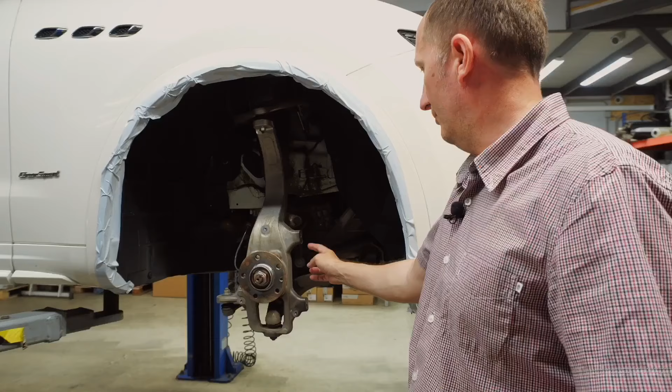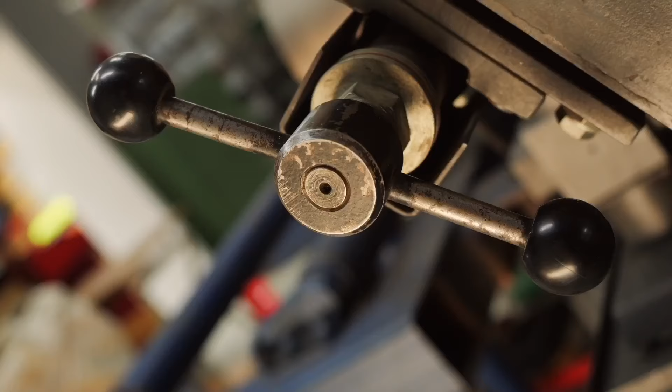The required part is covered with protective tape. The rear axle consists of a floating caliper with a servomotor initially. The front axle is a 6-piston caliper by Brembo, composite brake disc and an aluminium hub part on pins. The whole design is quite well done, but the size is smaller than required for this power and mass. Here we will have a bracket installed, as we are about to show you.

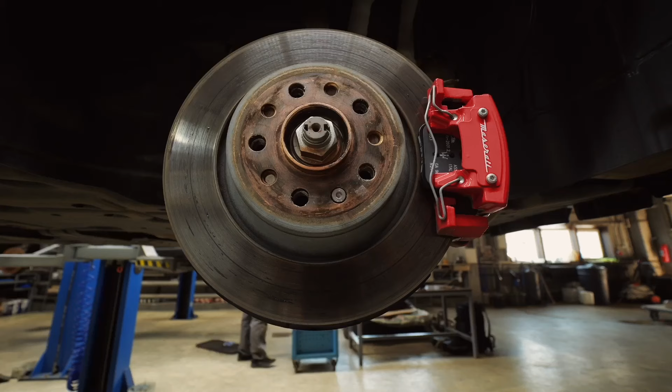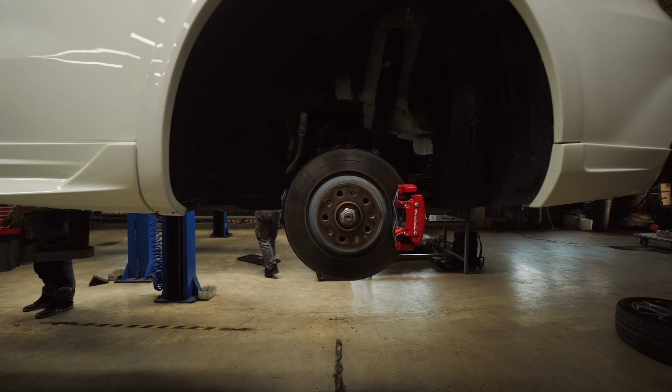Now I will tell you how the design of the braking system is being developed. The car arrives, we dismantle the braking disc, the default braking system, and eventually we see a marvelous aluminium knuckle by Maserati with radial binding of the braking caliper. The caliper is a default 6-piston one, but for quite a small braking rotor.

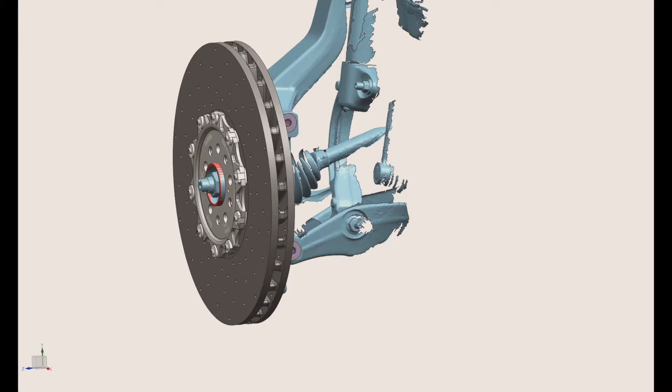For the technical task we have to use a carbon ceramic rotor sized 440 by 40. We place it for a correct angle by the Z-axis. Then a hub part is designed and this assembly is practically done. Then we have to line up a brake caliper. Here we will have a 6-piston caliper by Brembo

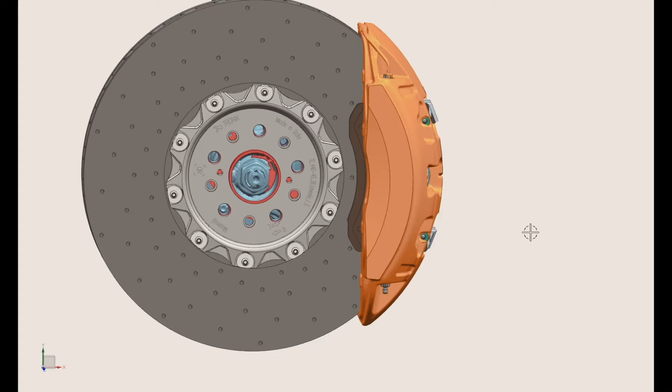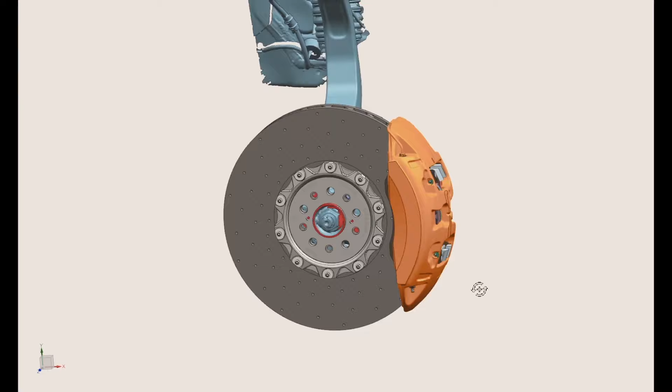with a zirconium dioxide insert. Initially, the caliper is installed with the binding behind the axle of the car. As we plan to install it before the axle, we will have to change the polarity. That is why we unscrew these fittings here and place them on top, whereas the tube is placed below. For now it is not seen here, as we still have to recess in this spot.

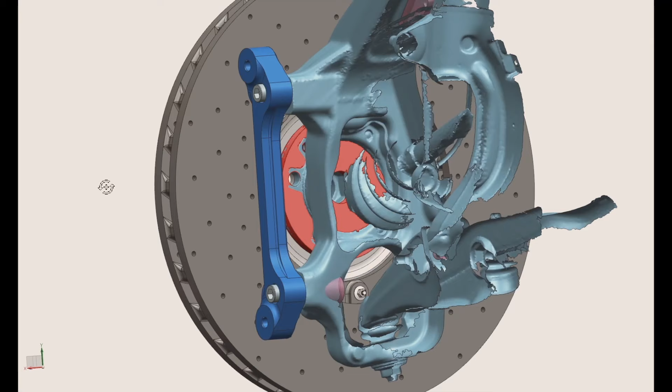The caliper is already colored. In order to fixate the caliper, we need to design a bracket. It is identified with a blue color, made from aluminium. It fixates our caliper with 2 screws.

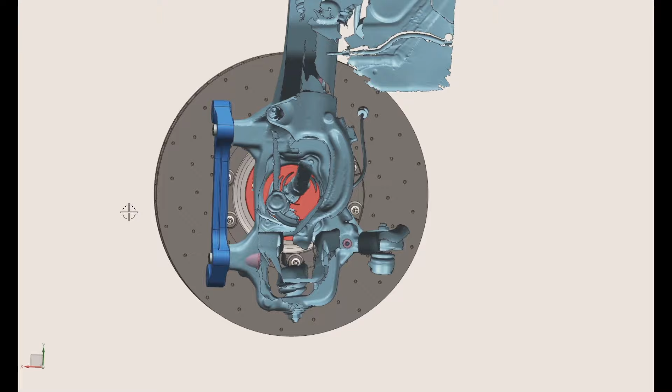Like this, 12 by 50. Firstly, it is installed to the knuckle. Then the caliper is fixated onto the bracket. Then we have to design a protective shield, which is installed in order to guard the whole construction from dirt and snow in winter times. It completely safeguards the insides of the construction, consists of 2 plates and is fixated with a few screws.

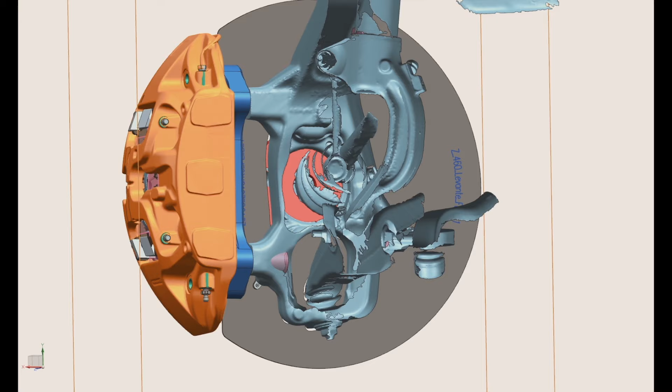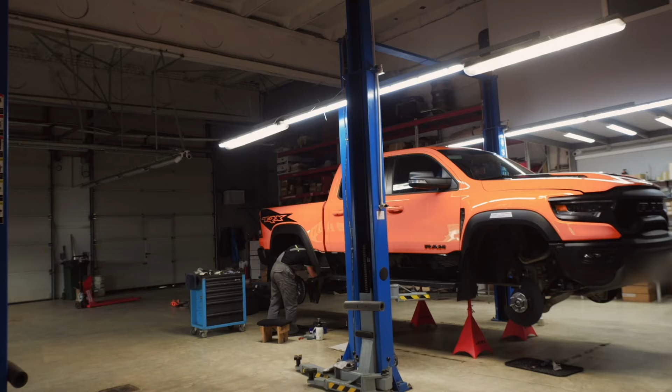After all of this is complete, there comes the fun part, to see how all this connects to the wheel disc. The wheel disc, may I remind, is 21 by 9. Seems to be no gaps here, everything's fine. The design work is done.

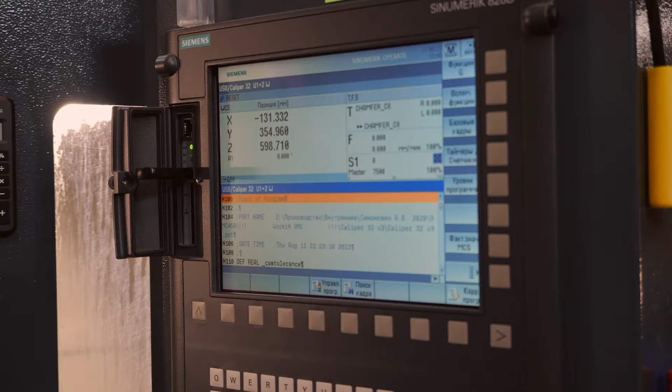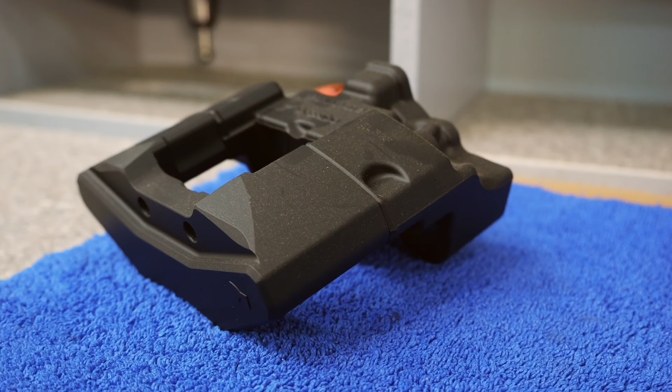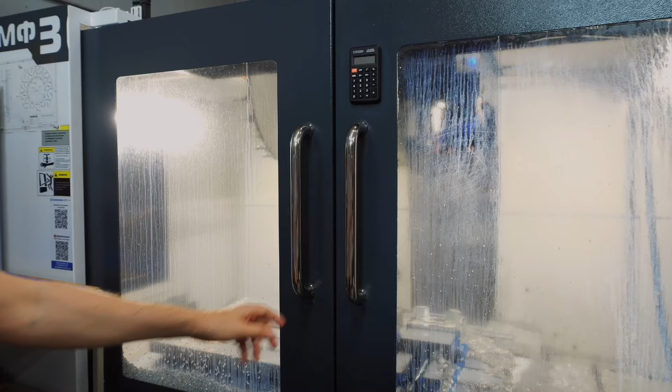Here's how this part will look on the caliper. And here it is after electroplating, colored, but not yet assembled. Now we will remove it from the machine.

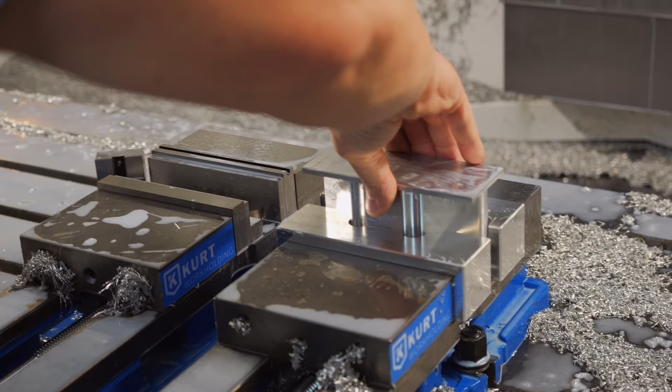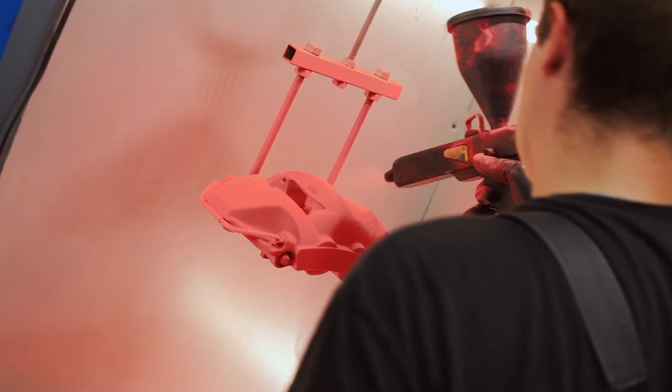This blank goes here, as this is the first setting to do the contour. Then the part is moved here into the vise for the finishing touch. Here is how it looks when it's ready.

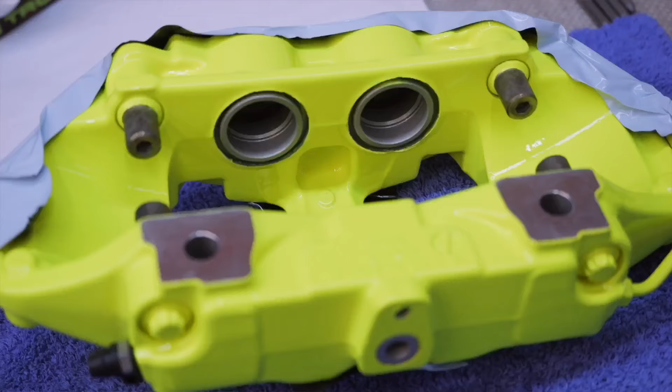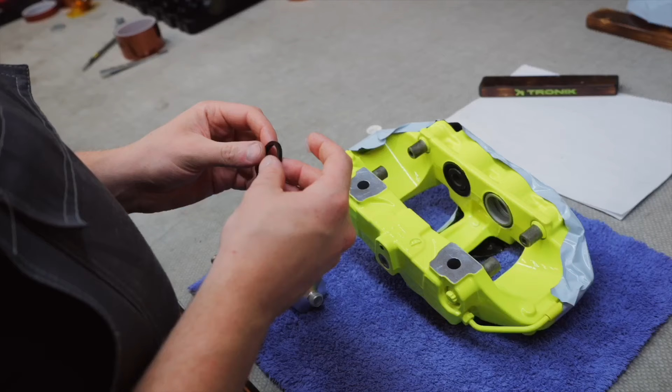Here we have done the coloring of the caliper, but before the coloring is done, everything is disassembled, of course. Pistons and pins are removed. The surfaces that do not need coloring are covered, so the mating plane here, the banjo bolt here, and of course the piston sumps. The rear caliper almost always comes with an aluminium piston. Here's how it looks.

For the front caliper, if the carbon ceramic rotor is used, the temperature of the rotor can go as high as 600 degrees Celsius. Therefore, in order to minimize the transfer of heat from the piston to the brake fluid, this heat insulation insert is used, made from zirconium oxide.

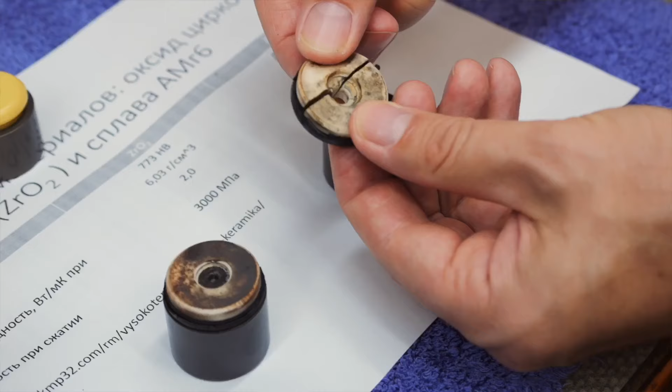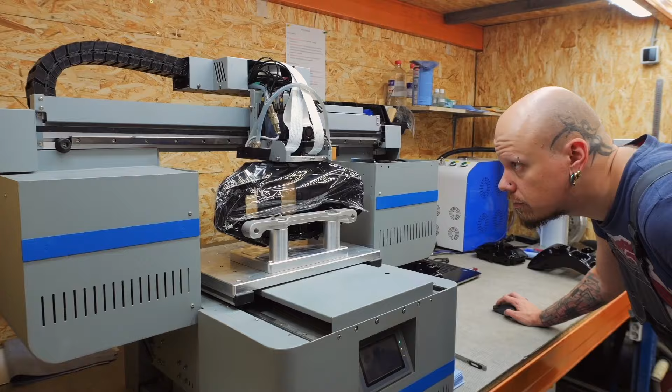For example, this is a used piston. As you can see here, everything is burned out. See the cuff? It's almost gone to stone. The insert from zirconium oxide looks like this. It is actually quite a solid material, which cannot be said about this piston. Take a look, it falls apart pathetically. To me, this piston has done its job and was probably heated up to 400 Celsius, maybe even more.

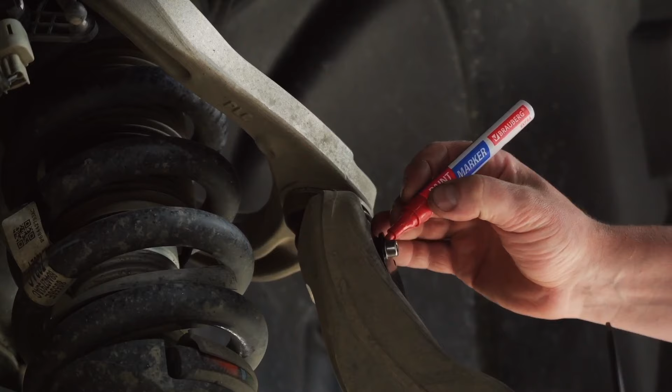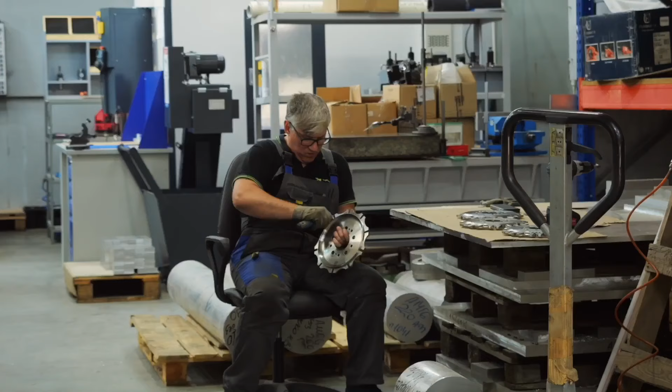This lineup here are the pistons for the front caliper. They are of different diameter. And this here is the ring of square section for hydraulic sealing. And these are protective dusters. This is the rear axle. Here the piston is more simple, done from aluminium alloy and coated.

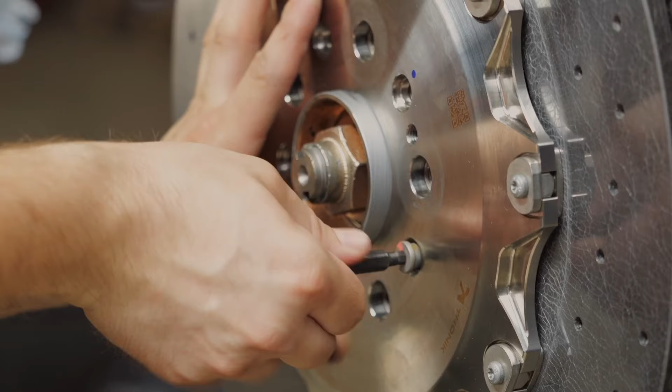The front rotor, 440 by 40, is already assembled, checked, all fine. Now we will be assembling the rear ones. The rear one is 410 by 32. The hub part has been engraved and signed.

Now we need to insert bobbins into the hub part, and it is done like so. The principle of this assembly is that the bobbins move relative to the hub part. This is done in order to compensate for the difference in thermal expansion of the materials. The hub part is titanium, but the rotor is ceramic, and with temperature rising, there is tension if the bobbins are fixed too tight. This design here allows for some space to be maneuvered.

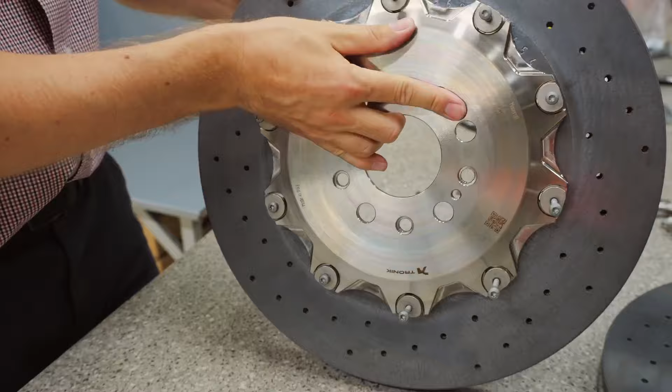Install the washers, and now we need to gracefully position the whole part. We double check that everything is firmly in place.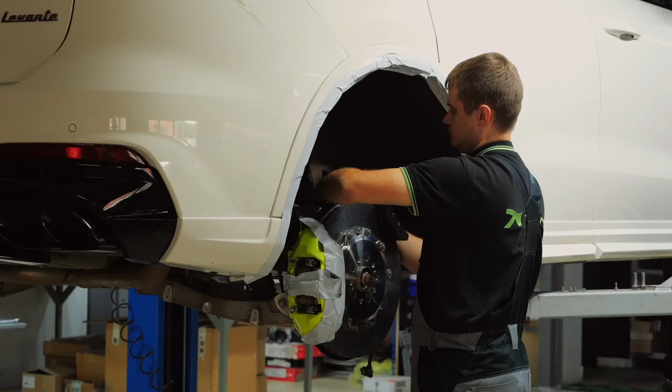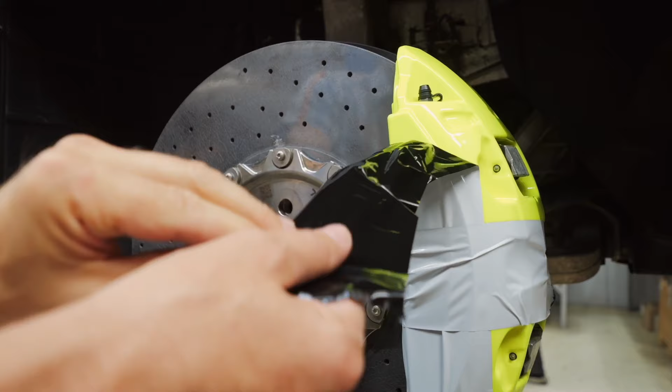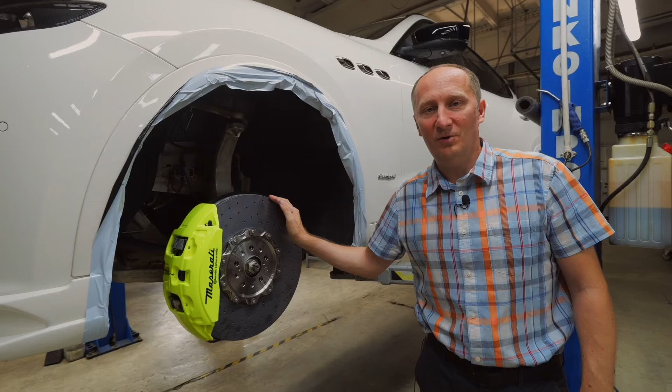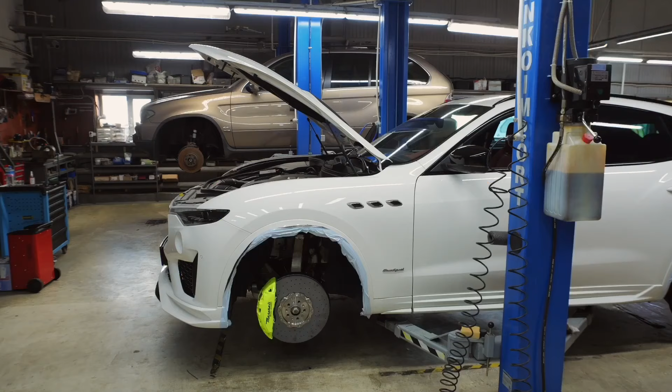We have finished the installation of the brake system for the vehicle Maserati Levante. For the front axle we have a rotor 440 by 40, a 6-piston caliper, carbon ceramic brake system, and the hub part is titanium. All our required attributes like protective shields and brake tubes are present. It is important that all the default functions work flawlessly.

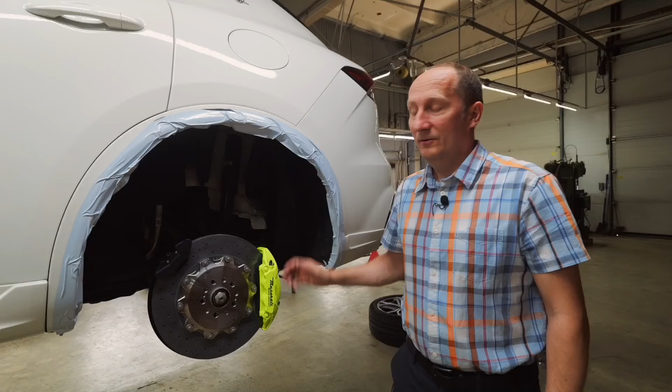That is why we use the default sensor for the brake pad wear. Here is a fixed connector on this bracing, and here we see the brake tubes. We also install this small plate for the owner to know what temperature this carbon ceramic brake rotor was heated up to.

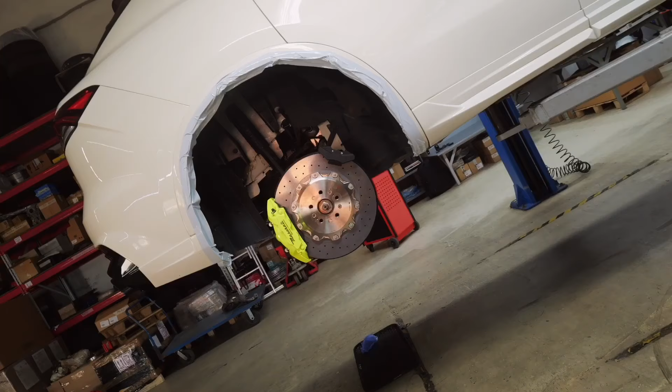For the rear axle we use the brake rotor 410 by 32, a 4-piston caliper and a parking brake caliper. All functions perform as by default. We also marked it to control the allowance of the maximum temperature.

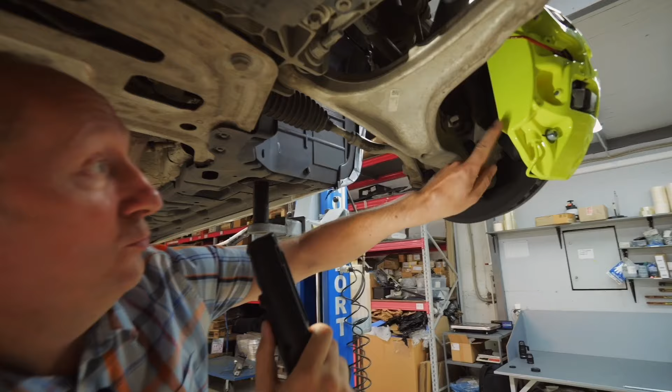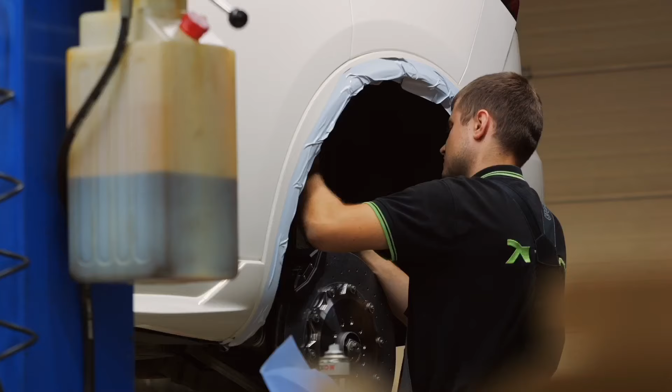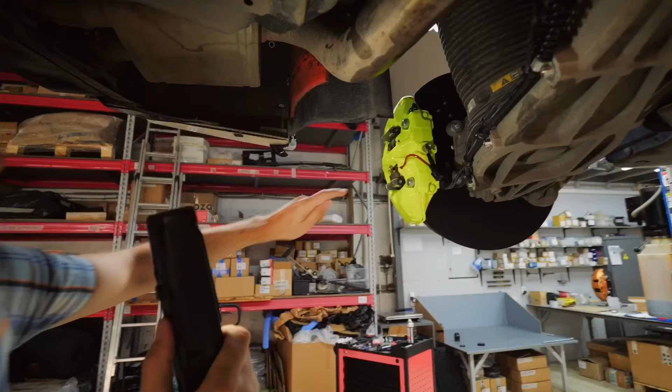The front axle is equipped with a carbon ceramic brake system as well as the rear axle actually. The caliper is installed to the aluminium bracket. It has been electroplated and colored after, and also this protective shield. The brake tube is laid through default brackets, as you can see here.

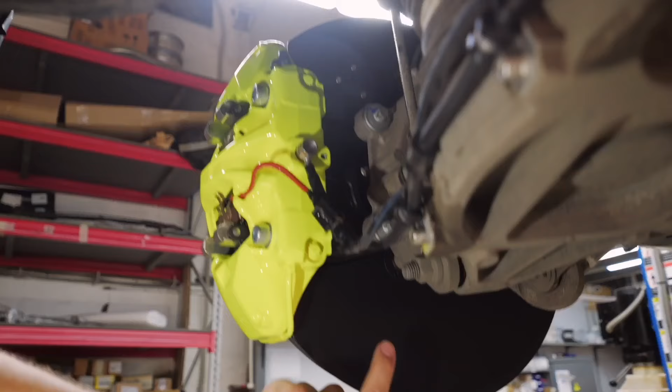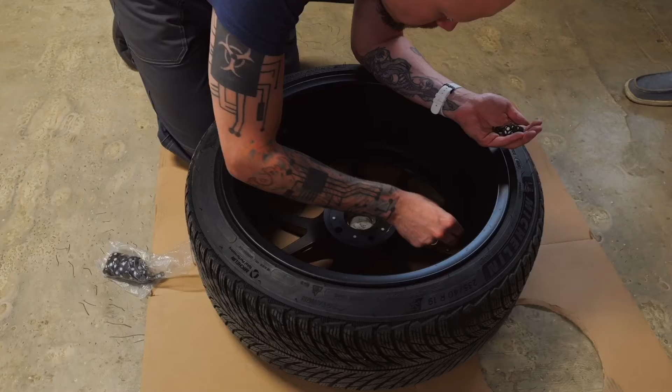Now onto the rear axle. This is a 4-piston caliper which is responsible for hydraulics. Here is the brake tube and a sensor for brake pad wear with binding. Default manufacturing. All this is being fixated by 3 screws and some collars. It is important to protect the rotor from dirt, sand and water.

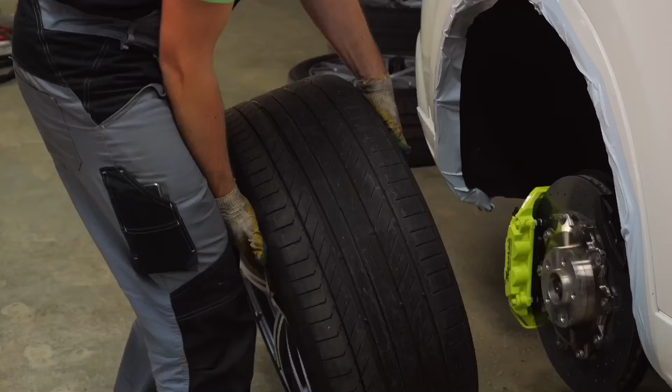And here we have a parking brake caliper. The hub parts are titanium, designed and done by us.